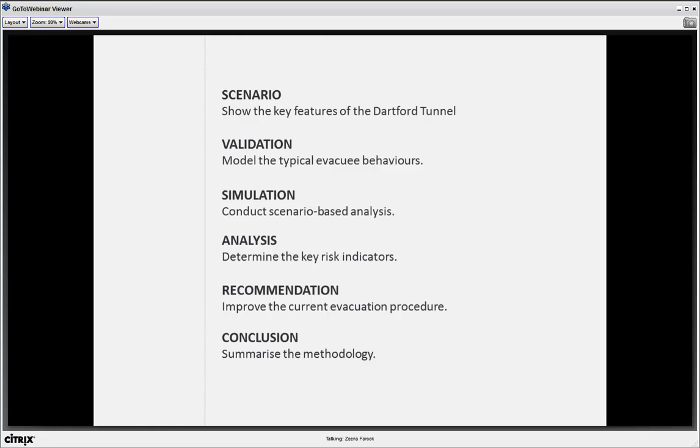So, why Dartford Tunnel? It is the busiest London road tunnel. It carries over 75,000 northbound vehicles a day, more than any other London road tunnel. Clearly, a fire at this key corridor is likely to bring loss of life and great economic damage. Therefore, a risk investigation on its current evacuation procedure is important to provide maximum protection.

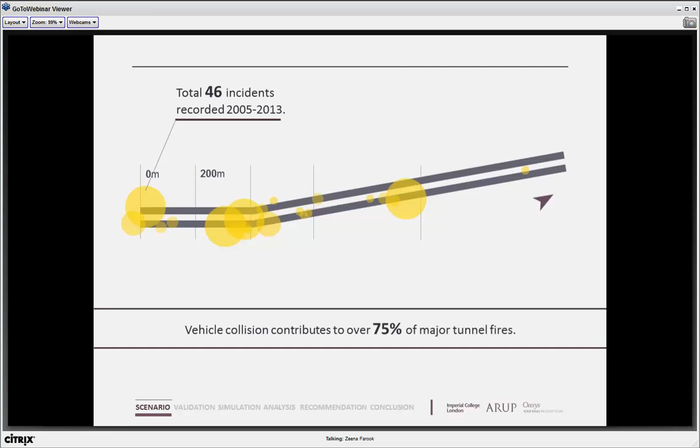To select the critical safety scenarios, we need information about past fire events. However, given the sensitivity of the information available, data on vehicle collisions is instead referred to in order to identify the likely incident locations. It is an appropriate assumption, as vehicle collisions contribute to over 75% of major tunnel fires globally. Most of the incidents occur at locations 400 and 715 meters inside the tunnel.

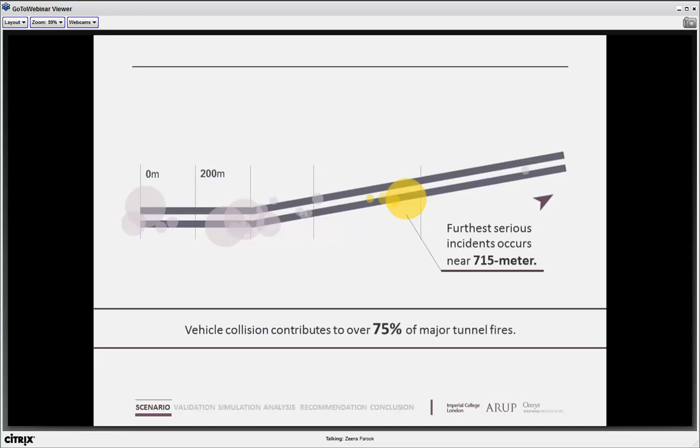For this demonstration, I will use the possible worst-case scenario at the 715-meter location, where we expect the longest evacuation distance, but also the longest evacuation time that may be required. When fire occurs, the tunnel entrance is expected to be closed within the first 3 minutes, depending on the time of day and how much traffic we get at that time.

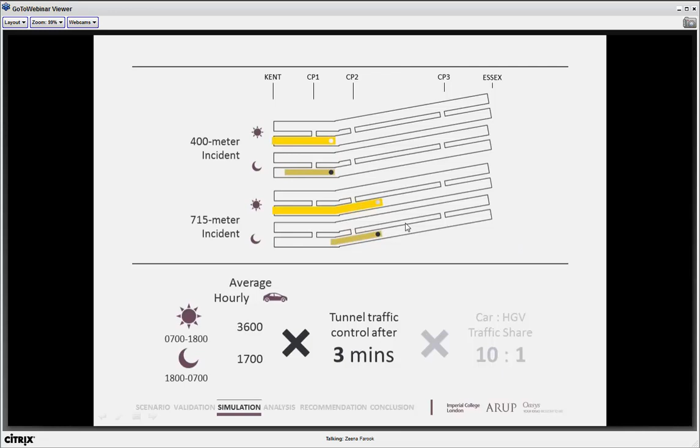We consider 4 different scenarios, and they all have different lengths of vehicle queuing inside the tunnel behind the fire spot, as you see here. On the other hand, the traffic share between cars and heavy goods vehicles is about 10 to 1. Considering the Dartford Tunnel is a very important truck corridor, it is important to model the presence of HGVs here.

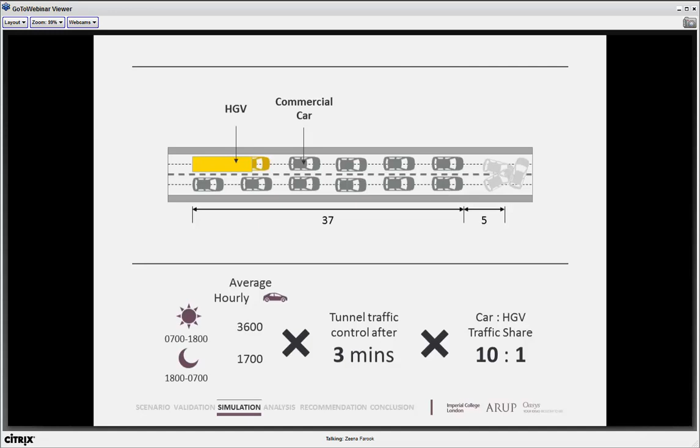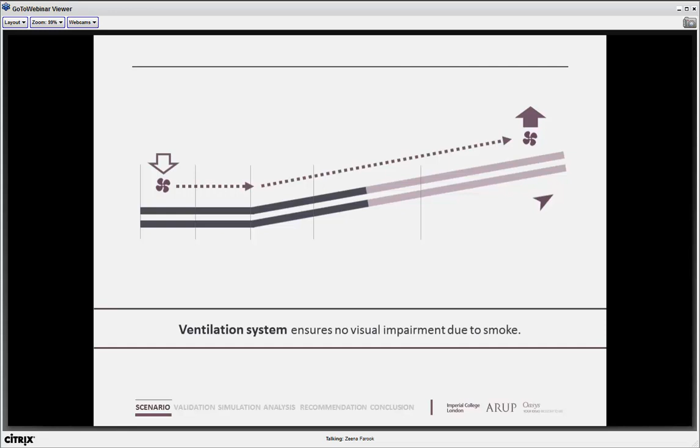Now, we assume all vehicles are accumulated in a regular compact format as so. They all remain stationary throughout our simulation. Furthermore, ventilation systems operate northbound to create a smoke-free evacuation area, so it ensures no visual impairment among the evacuees.

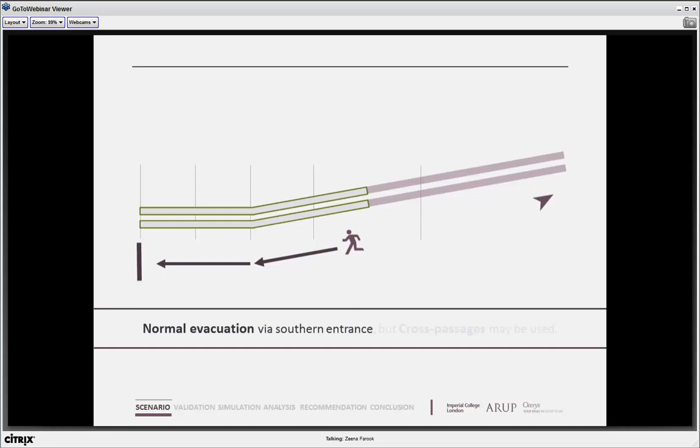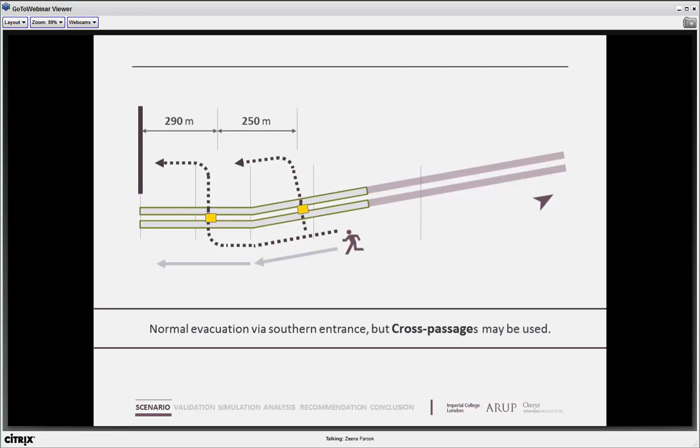Normal procedures require evacuation via the south entrance. Under special circumstances, the cross-passage facility may be used to reach the adjacent tunnel, and evacuees may leave from there. With the tunnel features and traffic data available, the 3D model is then constructed in Google SketchUp before being imported into MassMotion.

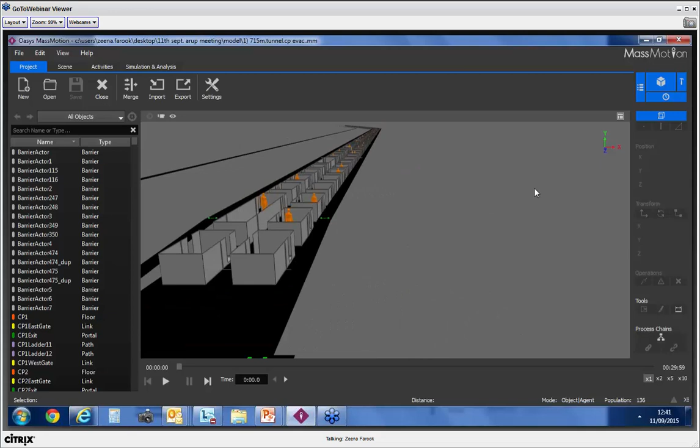The ladder accesses to the raised sidewalks, as you see here, are about 50 meters apart from each other and available inside the tunnels. Under the current traffic conditions, we expect many vehicles and occupants may be affected by the evacuation. So the sidewalks may be used as an alternative route to avoid congestion on the road surface.

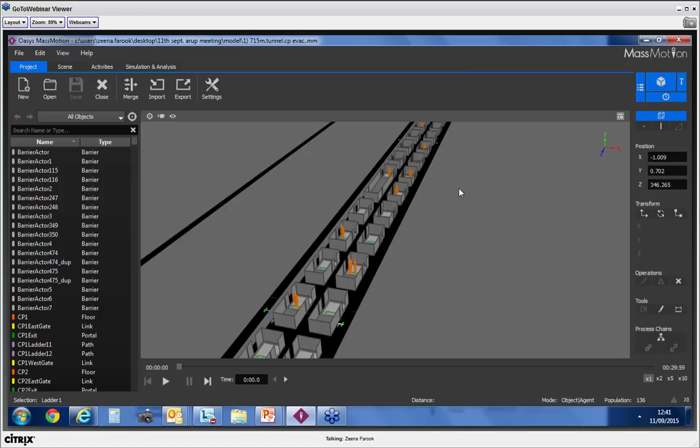Our model considers the evacuation in one of the twin bores. The cross passage, highlighted in orange, connects the sidewalks of the two adjacent tunnels. Furthermore, vehicles in our simulation are modeled as 4.5 meter by 2 meter hollow barrier sections.

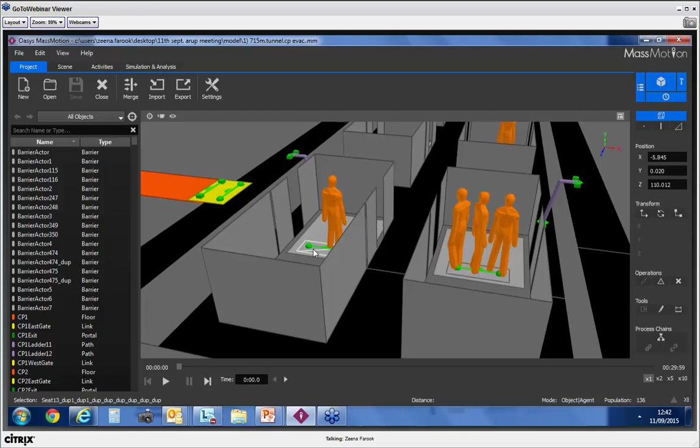The origins of agent movements here, called seats, are inside the individual vehicles. It's meant to mimic the realistic movements of people: to start the movement from inside the cars, open the door, and evacuate towards the safety exit, which is here, the tunnel exit.

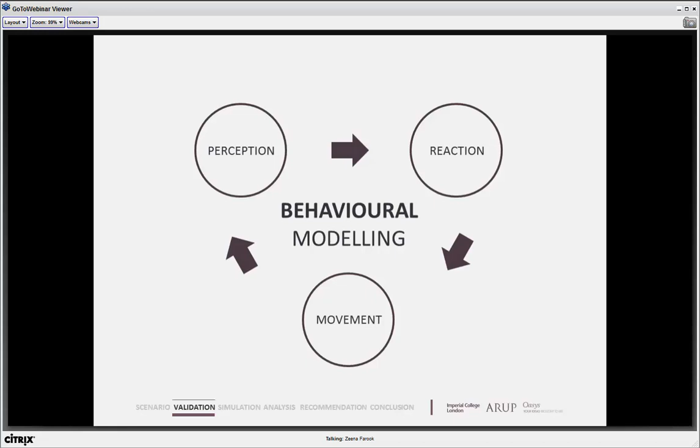Again, the evacuation area, as you see, we expect to be very confined and highly occupied. So the corresponding evacuees' behavior needs to be understood and carefully modeled. Traditional behavior modeling considers humans to perceive and react to the environment before they actually commit to the evacuation. This decision-making process is a continuous phenomenon during the entire evacuation procedure, but highly associated with individual characteristics. Hence, we want to use different modeling techniques to capture these differences and so model realistic crowd dynamics.

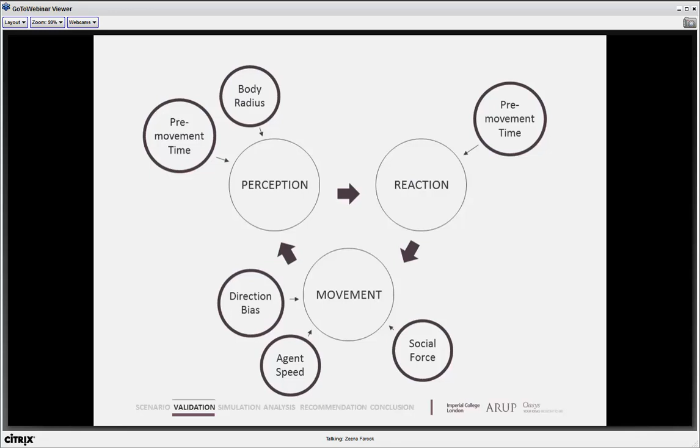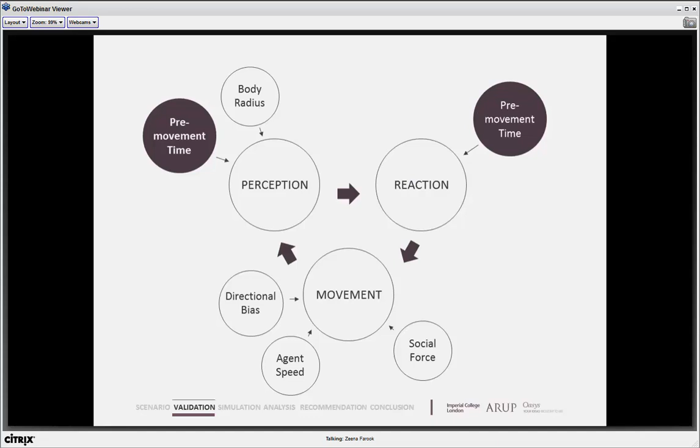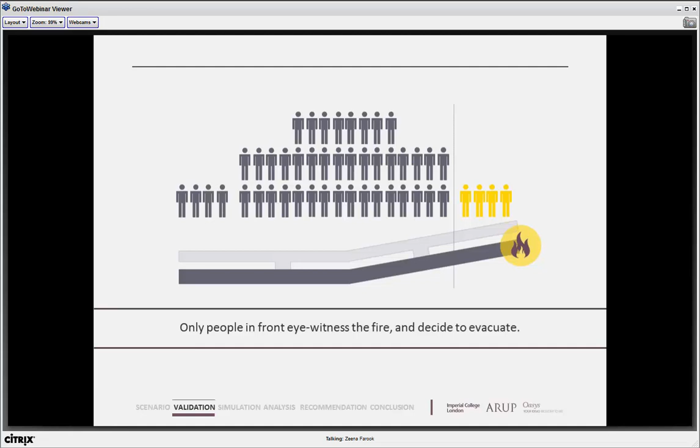The most interesting parameter to look at is the pre-movement times. It is indeed an influential factor in the overall evacuation time required. Initially, only the drivers in front of a queue encounter and observe the obvious danger of fire. That means flame, smoke, and heat. So they detect the danger and decide to retreat and leave the tunnel earlier. These actions then become a significant source of social influence, particularly in these commonly unfamiliar surroundings. And so it will initiate the group evacuation of most of the normal drivers left behind.

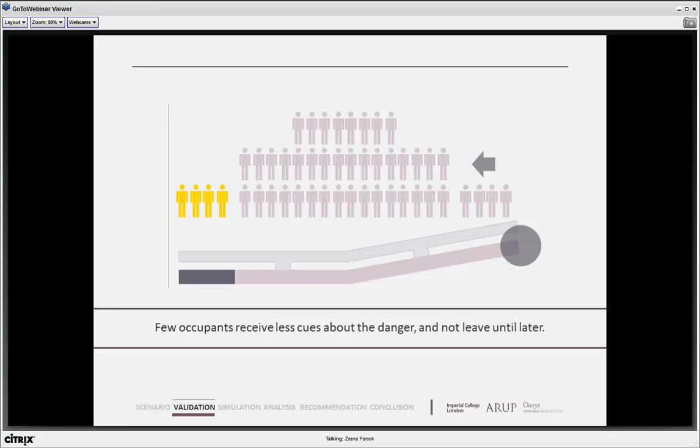Unfortunately, a small number of occupants situated far behind in the queue may receive fewer cues about the danger, because they won't see many things go wrong around them. So they would evacuate much later in the process. As you see, this wave pattern of extending evacuation time can be best generalized by a normal distribution, ranging from 30 seconds to 210.

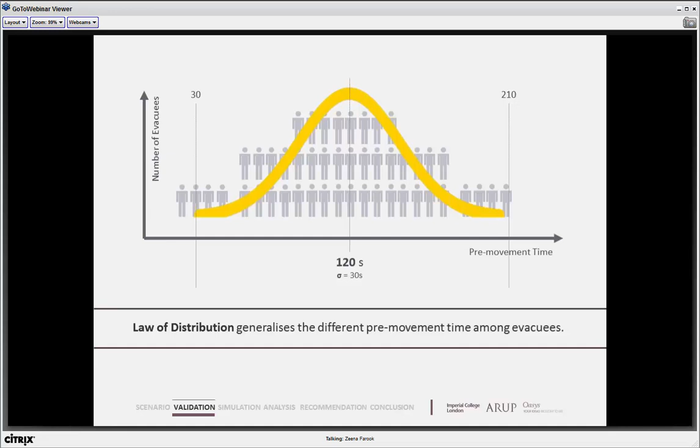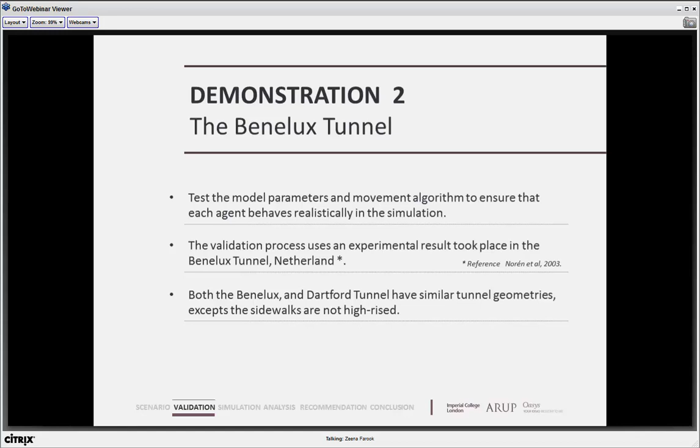The parameters were then tested to ensure each agent would behave realistically in the simulation. As no verified data on fire evacuation from the Dartford Tunnel is available, they were validated using results from a behavioral test of evacuation conducted in the Benelux Tunnel, Netherlands. Let's have a look at the validation model itself. A similar scenario, as you see here, compared to the one we had in the Dartford Tunnel is considered. This situation was injected at a mid-tunnel section with a similarly compact vehicle accumulation behind.

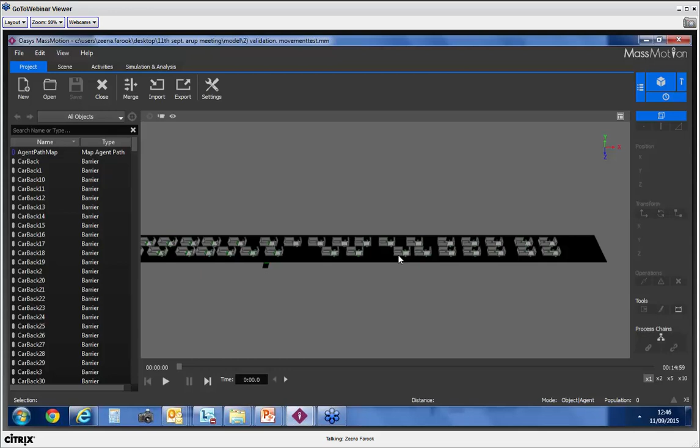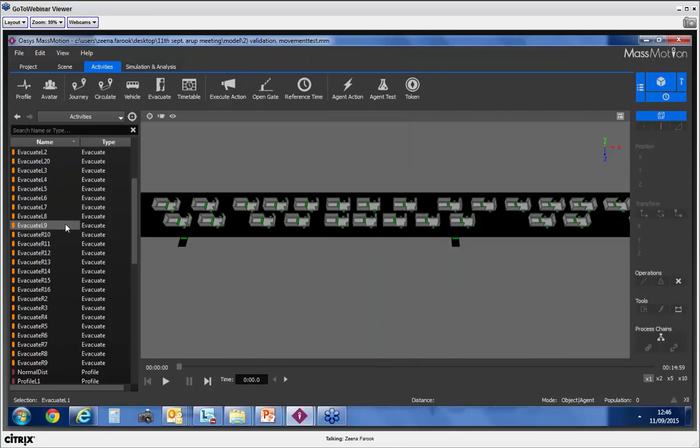All evacuees react to the situation within the expected range of pre-movement times. That means, as we mentioned, 30 seconds to 210. They all start their movement from inside the vehicles. See here. And all move towards the nearest safety exit available. This means, as you can see, this and here. The first experiment is to explicitly input the agent properties. Here we are talking about the origins, the pre-movement times they had, and of course the individual profile. That means the body radius and the speeds they had. And also we assume they remain constant throughout the evacuation process.

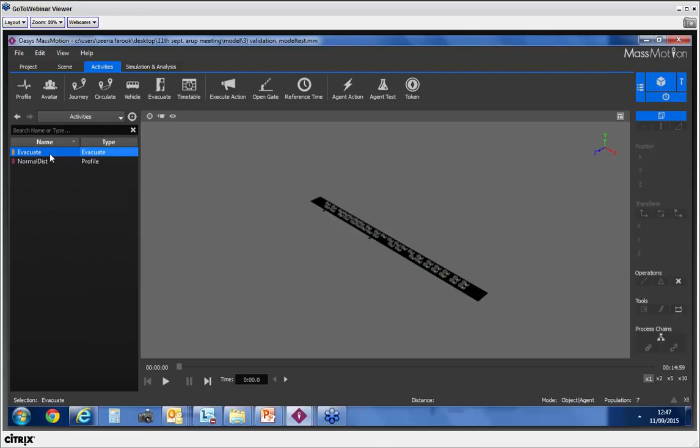The second model we use is probabilistic modeling on agent properties. Here we introduced a normal distribution on pre-movement times, minimum 30 seconds, maximum 3 minutes and 30 seconds. That means 210. Mean is 120, and standard deviation is 30 seconds. The exits are set to be these two that we mentioned, the safety gates. And of course, we also introduce a default normal distribution with a minimum 0.65, maximum 2.05, mean 1.35, and standard deviation 0.25.

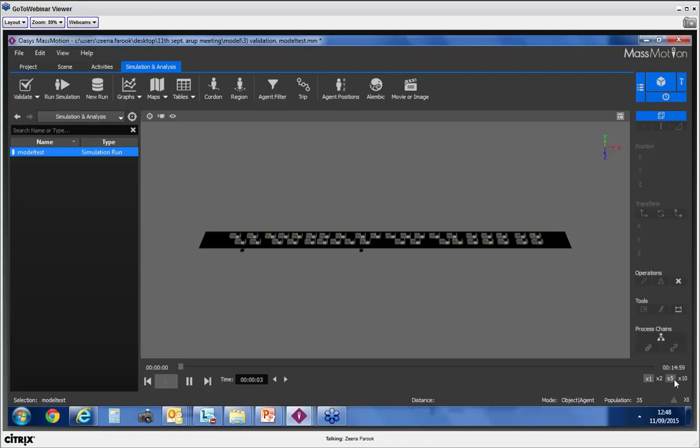So let's have a look how the evacuation will look. So make it a bit faster. They will start to move. They move out from the individual cars, and they will seek the least congested and nearest route to reach the exit. Individual evacuation time will be recorded once they reach the safety exit.

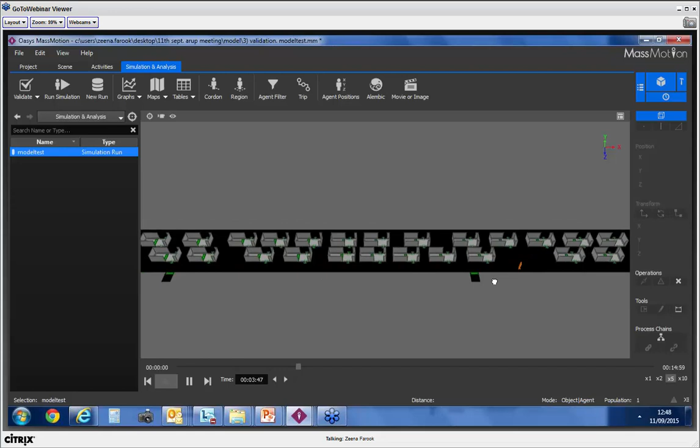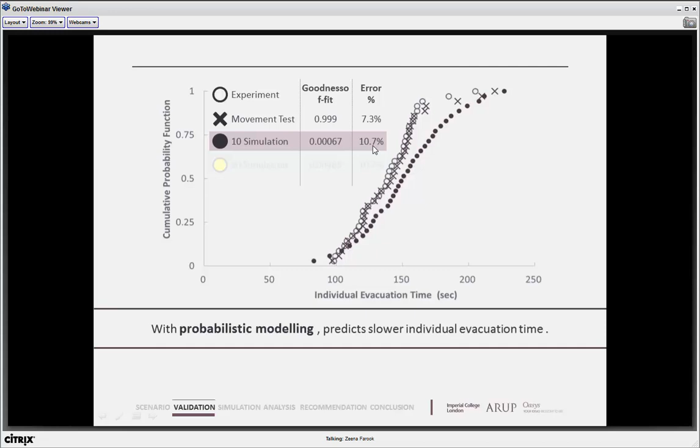So here we are. By explicitly inputting the individual characteristics, that means the pre-movement times, agent locations, but also velocity, the MassMotion model indeed reproduced the original individual evacuation time, within a satisfactory range of error of 7.3%. It certainly suggests that the movement algorithm is consistent in mimicking realistic crowd movement. On the other hand, the probabilistic modeling predicts a slower individual evacuation time, as you see here. The 10.7% modeling uncertainty is due to the nature of stochastic modeling. It is, however, affected by the number of simulations that we executed.

Here, by having an additional 20 simulations, the increment in goodness of fit suggests a clear improvement in prediction accuracy from 0.00067 to 0.00885. The generated 10.7% error on predicting the total evacuation time is acceptable in other validation projects of MassMotion. Here, without further simulations, the selected parameters are confirmed to be appropriate for our behavior modeling of tunnel evacuation later.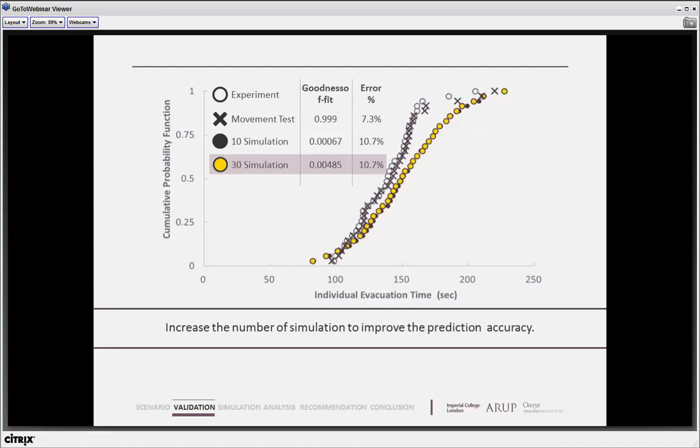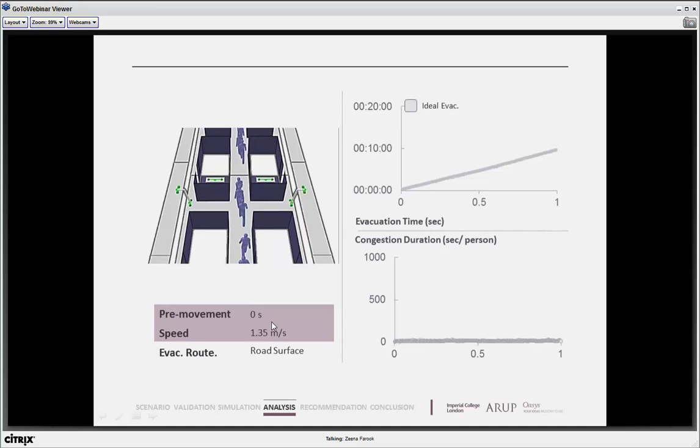Now, we have our parameters ready for the inputs. In this project, the following scenarios were evaluated, simulated, and the results collected. Firstly, a control experiment. It models the ideal evacuation, when all evacuees start to evacuate immediately without hesitation. In other words, pre-movement time equal to 0, and they move with a relatively similar, constant speed of 1.35 meters per second.

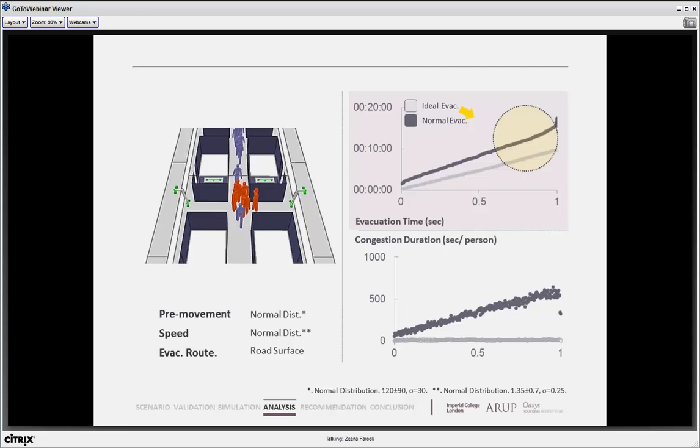A second experiment models a normal evacuation. Here we employ the distribution law of various pre-movement times and speeds, which vary from person to person. So the actual evacuation time is expected to be much longer. This increment is also believed to be due to the level of congestion evacuees experience, as the movements are interfered with and slowed down. So in the third experiment, as I mentioned before, all evacuees are modeled to use the sidewalks to avoid the congestion on the road surface. Interestingly, the simulation has indicated increasing congestion and resultant time delays.

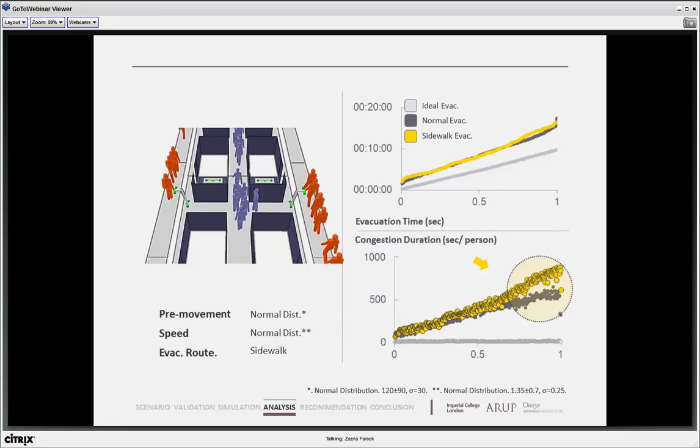In other words, the higher level of congestion they experience, the longer the evacuation time may become. To show where congestion may occur, let us have a look at the experienced density map distribution in MassMotion. Generally, people tend to choose the widest and least congested route to evacuate. This means here, which would be the mid-tunnel routes.

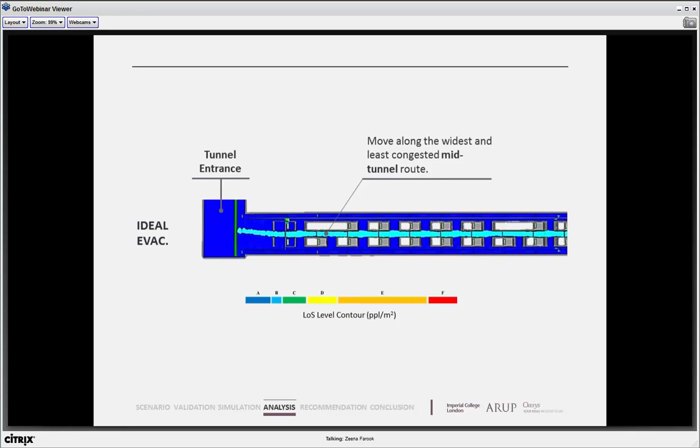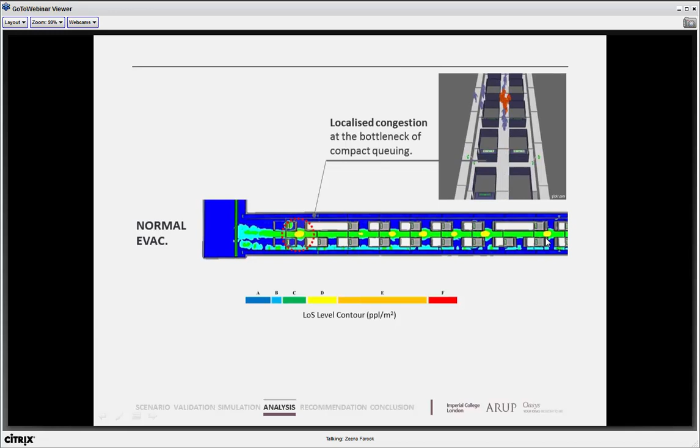In real evacuation, the resultant crowd dynamics would conflict with the stationary vehicles at the bottleneck, and therefore contribute to the localized congestion, as you see the reddish spot here, here, and here. When switched to the sidewalks, the approaching evacuees cannot overtake the slow marching company in front of them, particularly on the narrow 0.9 pathway. Therefore, additional congestion will be introduced.

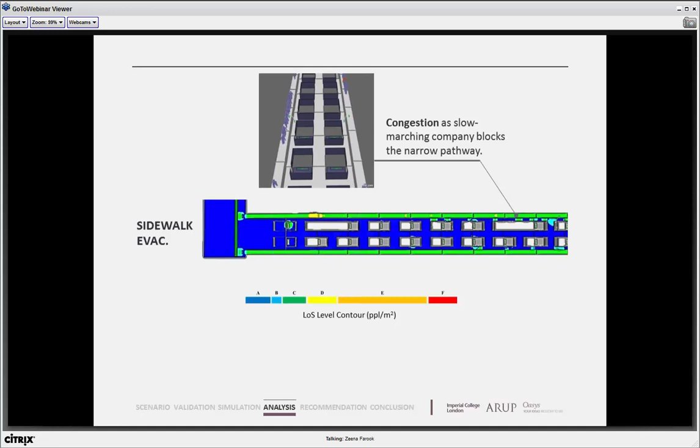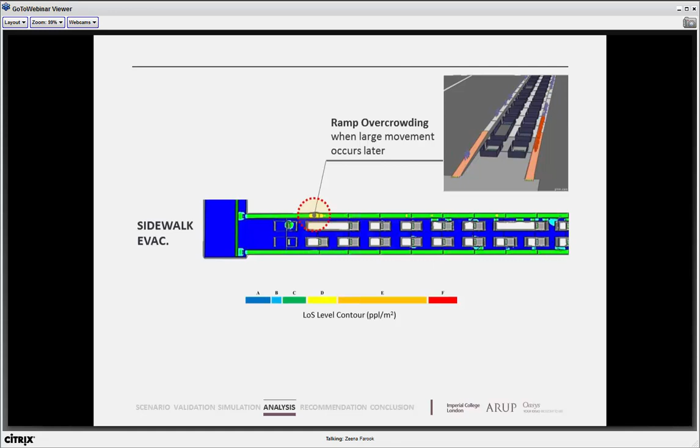Eventually, this unidirectional evacuation flow would overcrowd the ramps area near the entrance. It magnifies the congestion towards the end of the evacuation process. Furthermore, many real experiments report other sources of congestion. Evacuees may stop during their movement to seek extra safety information, such as readouts from the emergency signage. The stationary bodies can block others' movement, so congestion may occur.

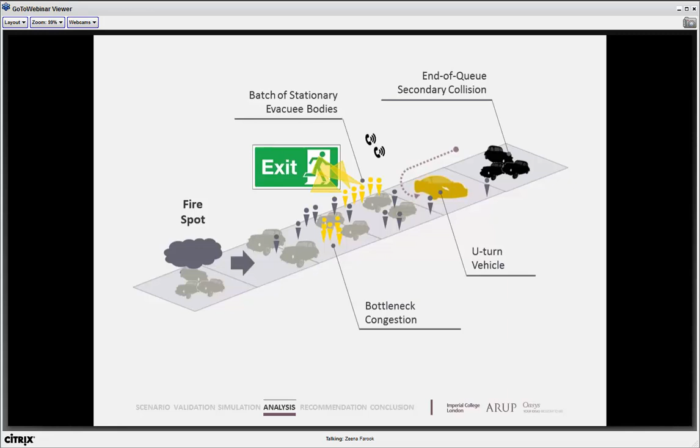From the driver's point of view, they sometimes execute the so-called U-turn driving to try to go around the queuing in front. Occasionally, it may cause additional secondary collision, which would block the entire road space completely. Congestion is often used to evaluate the user experience and system efficiency at a certain pedestrian density. The delay, as a result of it, increases the threat on evacuees of being caught by the quickly spreading smoke, particularly in tunnel evacuation scenarios.

Because the time and safety resources are very limited, it may also bring unnecessary stress among the evacuees. The potential resultant excessive behavior, such as stampede or overreactions, would cause further casualties or injuries. Here is some real observation during a real evacuation in the Blackwall Tunnel 5 years ago.

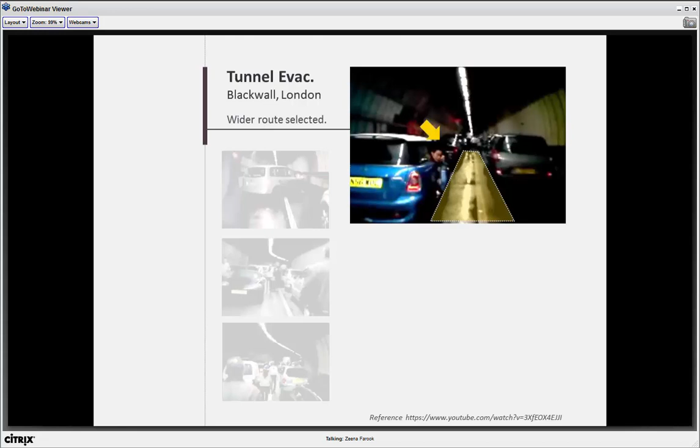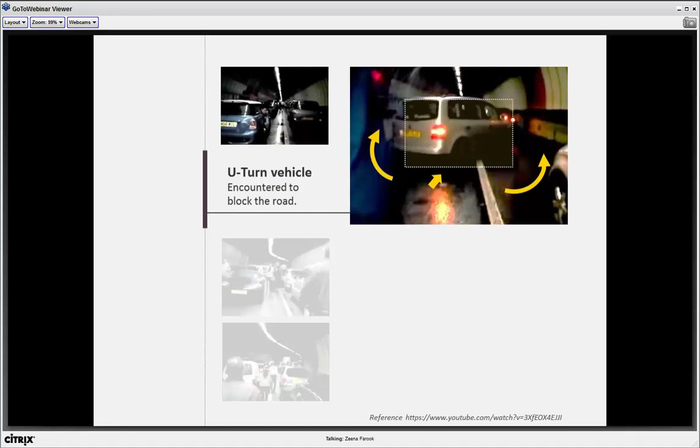Initially, people chose the mid-road and the least congested road to walk before they encountered the reckless U-turn driving and were forced to go around. Later on, the evacuating cameramen were seen by other occupants. They start to realize the problem, they start to evacuate, and it leads to congestion on the road surface. We have seen these safety issues earlier in the MassMotion simulation. That means how people choose the route, how social influence may affect individual decisions, and how congestion can affect the evacuation dynamics.

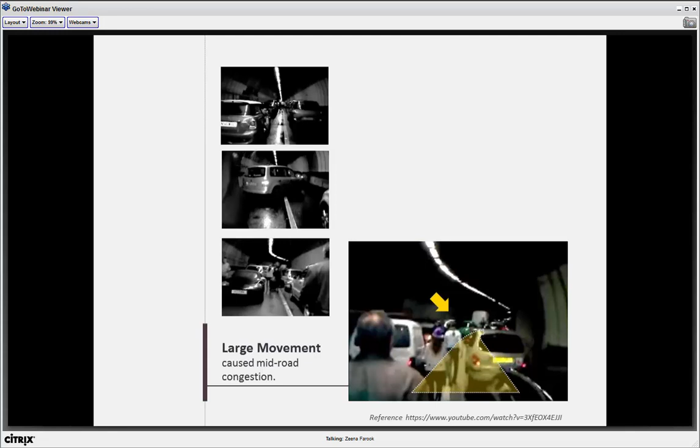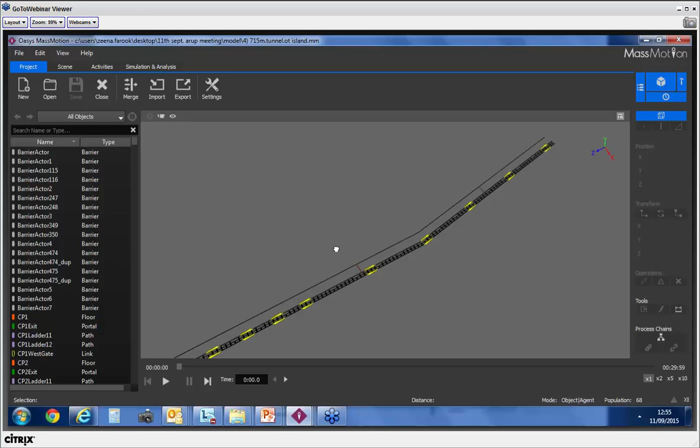In other words, our recommendation should aim to reduce the individual evacuation time, and that can be done by reducing the level of congestion. So let's have a look at how we can do the mitigations. Here is the evacuation scenario for the sidewalks evacuation. We put two barriers acting as secondary collisions at the end of the queue to block the entire road surface. So we use this to force the agents to use the sidewalks via the nearest ladder access.

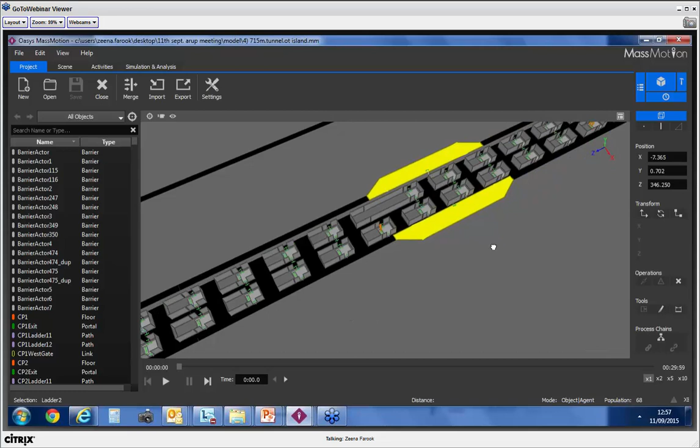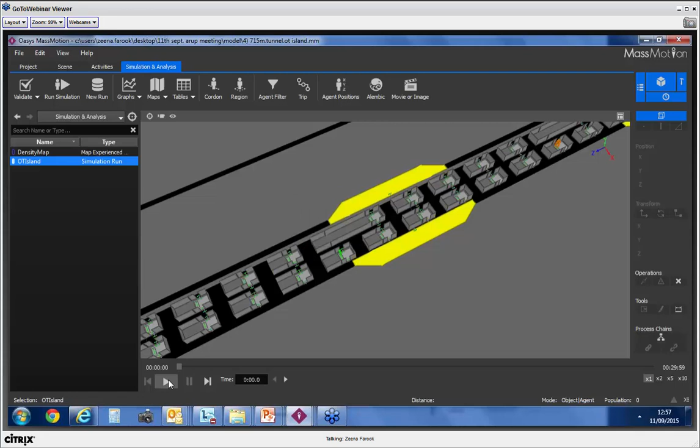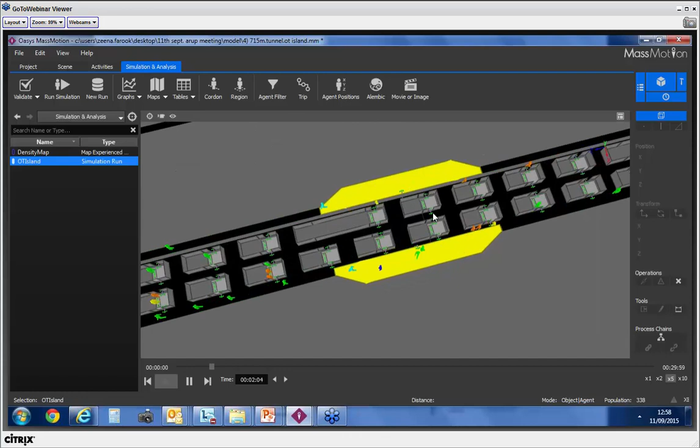And right now, there's still all the evacuees. They start to realize danger. They start to evacuate because they can't leave via the road surface, so they have to use the ladder to get onto the sidewalks. See here, and they all move towards the assigned exit, which is the tunnel portals. Soon you will see they start queuing. They start to see the queues. Let's just slow down a little bit. For example, here,

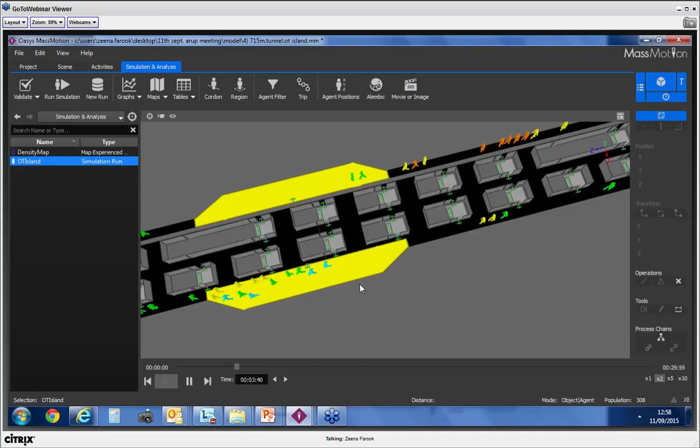see these queues. And when they get onto the overtaking island, the extra walking width allows the evacuees behind to overtake the slow marching company in front and carry on with a relatively higher speed of evacuation. Also, you can see here, they start to move around, find the free space, and carry on with the movement. Let's see the density map of this analysis. You can clearly see a dissipation of the evacuation flow once they get onto the overtaking island. So it certainly suggests that congestion is indeed reduced.

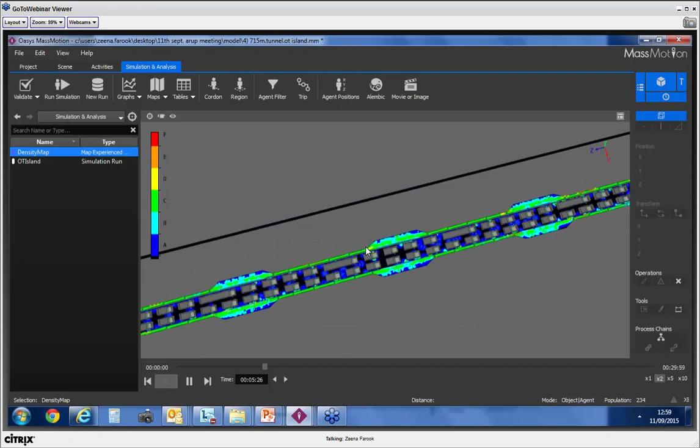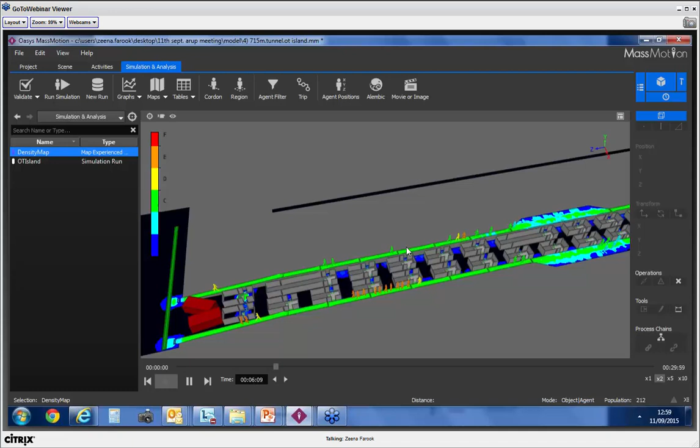Of course, considering the width expansion for the entire tunnel is going to be highly expensive, I proposed several OT island installations to ensure the slow marching company, the queue, can be completely dissolved and disintegrated. That means if you see the crowd here, it will be less overcrowded. The queuing actually is still there, but obviously going to be much shorter. And also there will be sufficient headway between them. So this is the first strategy we proposed, to use the overtaking island, and this is a passive control strategy.

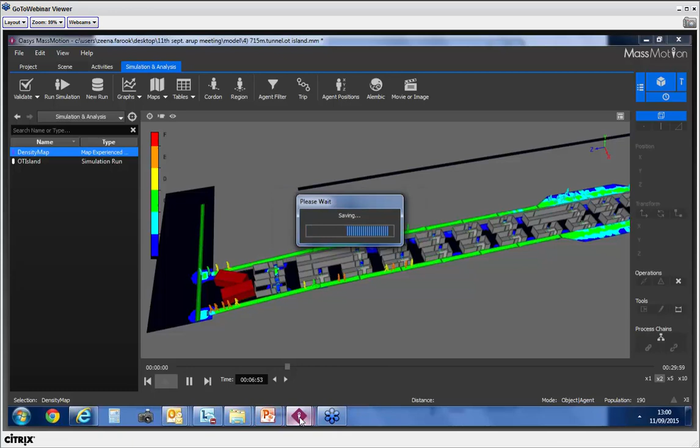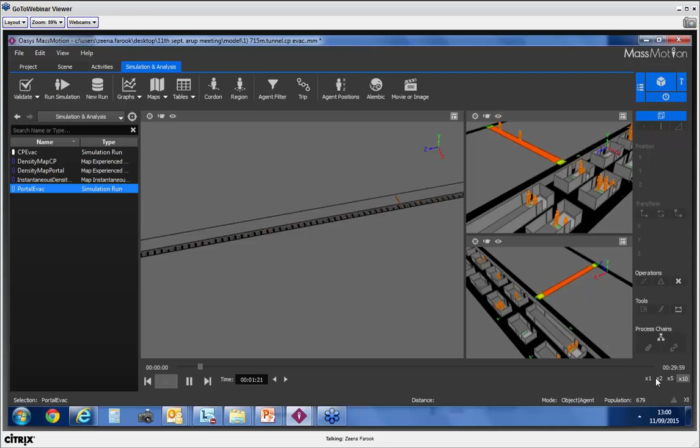The second plan we use is to run a cross-passage evacuation. Again, let's speed up a little bit. So this window here is for cross-passage 1, and this is for cross-passage 2. You see here. The alternative exit allows a two-way evacuation. That means to divert the flow from the portal directions. Let us see the density maps again.

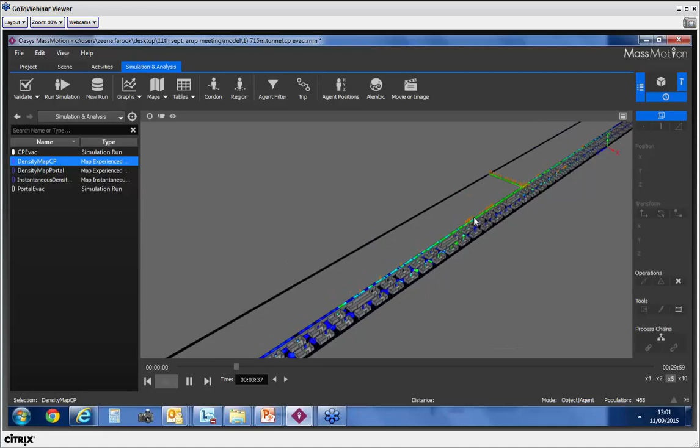Cross-passage operation, as you see here, makes the evacuee situated further behind the tunnel. For example, this part doesn't need to travel all the way up to the tunnel entrance. So they can just choose the nearest exit where possible to leave the incident-impacted tunnel.

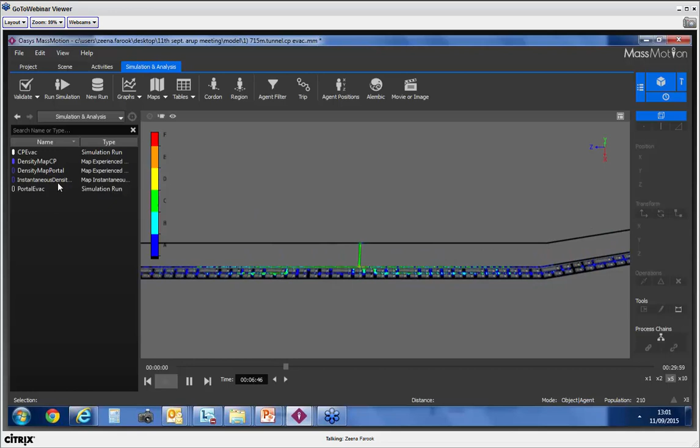Lots of reddish color disappears if we compare this to the density map of a normal evacuation. You clearly see a change that most of the reddish part actually disappears, which shows a magnificent reduction in congestion duration.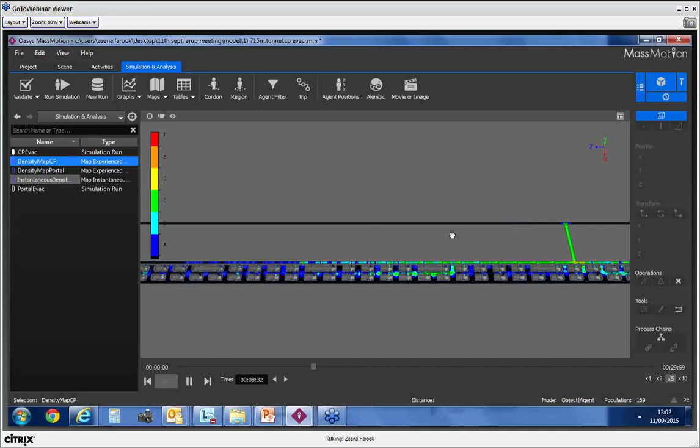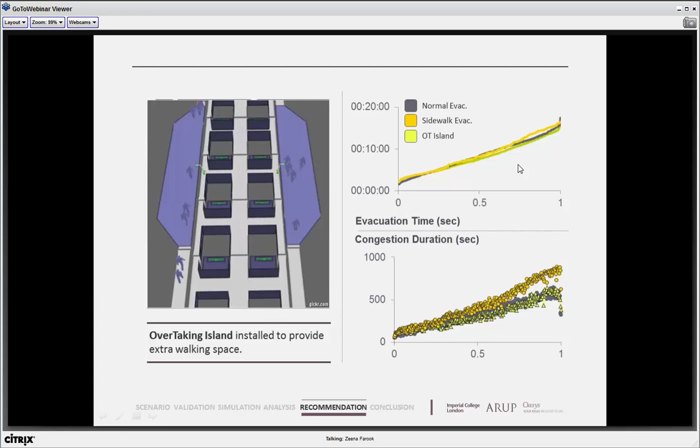Are they actually working to reduce the total evacuation time? The answer is definitely yes. Here, by alleviating the congestion using the overtaking island, we reduce the evacuation time for over 75% of the evacuees. This is because with less congestion, they can walk at a much higher speed, so they can reach the safety exit much earlier.

On the other hand, the active controls using the cross passage further reduce the evacuation distance for evacuees to reach the nearest exit. So here, the decrease in evacuation time is considered to be a coupling effect of congestion reduction and distance reduction together.

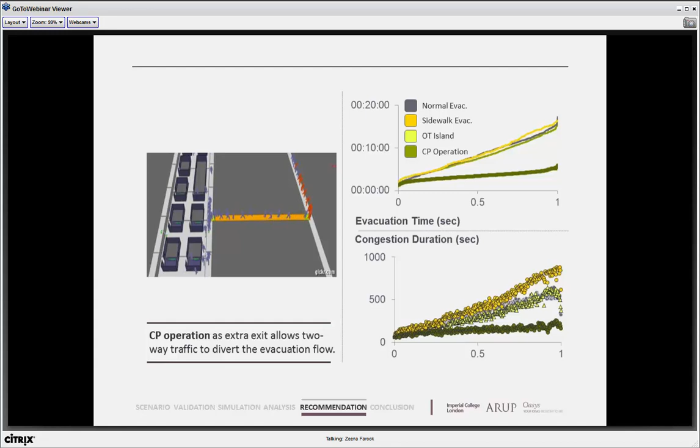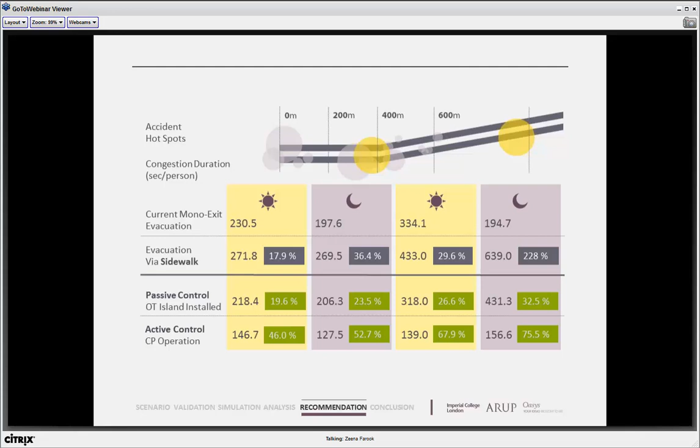Both the passive and active crowd control strategies are highly effective. Application of cross passage would deliver a remarkable reduction on average congestion by up to 75.5%. In many cases, it will certainly optimize the current evacuation plan in terms of alleviating the congestion. So we believe it's going to reduce the evacuation time required. It is important to have this additional safety time, resources, and exit available. It would help us to create a calm and safe evacuation order.

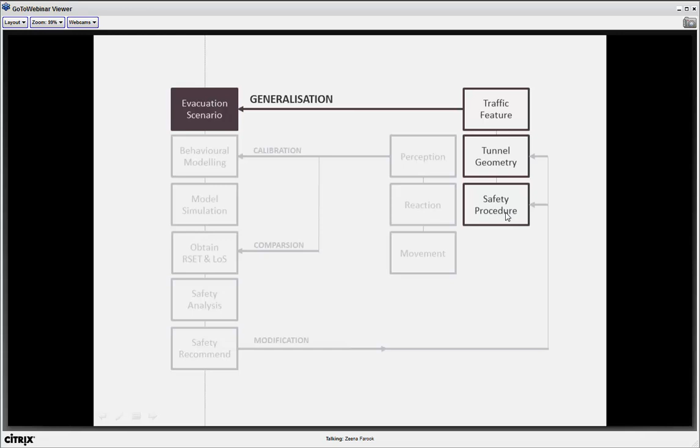So far, this project has shown you how a designed fire safety strategy can be evaluated and designed in a systematic manner. We first realised that the analysis requires considering a range of safety scenarios. It should generalize the key safety features, the traffic features of the tunnel, its geometries, as well as its current safety procedures. It then gives us the confidence to select and model the appropriate behavior factors, which must cover the following three stages of human decision-making process: perception, reaction, and movement.

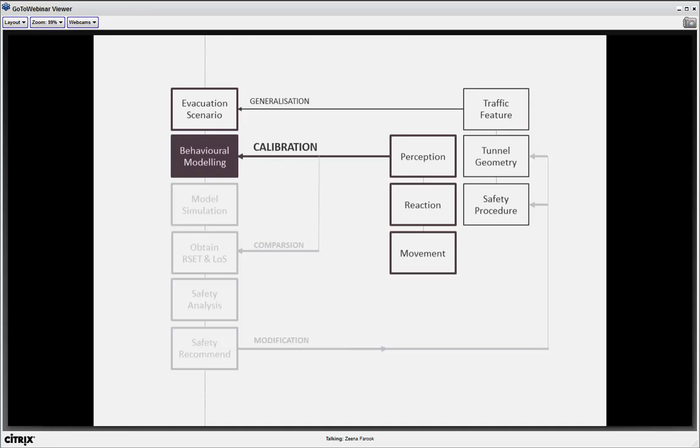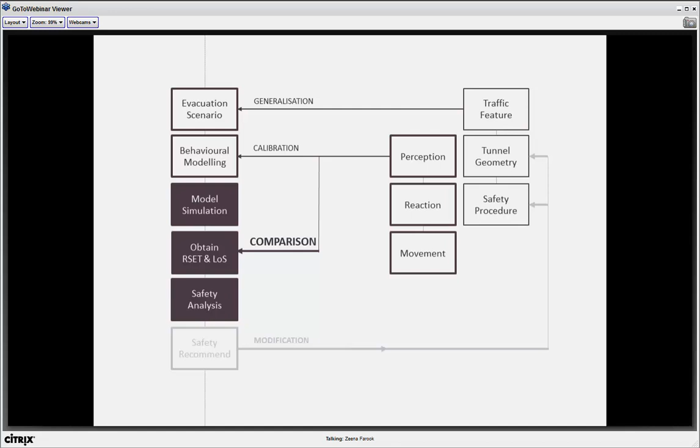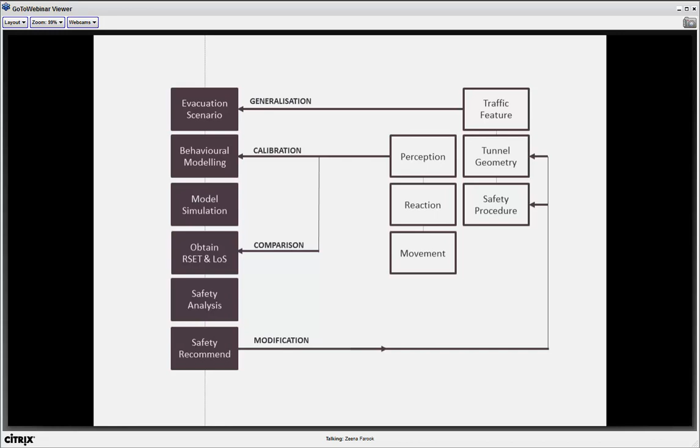Of course, a major uncertainty introduced to simplify a real fire evacuation situation is that we omit the influence of fire dynamics. This is mainly due to the current missing input available in the MassMotion version. As we previously addressed, the coupled effects of rapid heat and smoke propagation in a confined tunnel space can physically disrupt the perception of the occupants, and so distort their decision-making process.

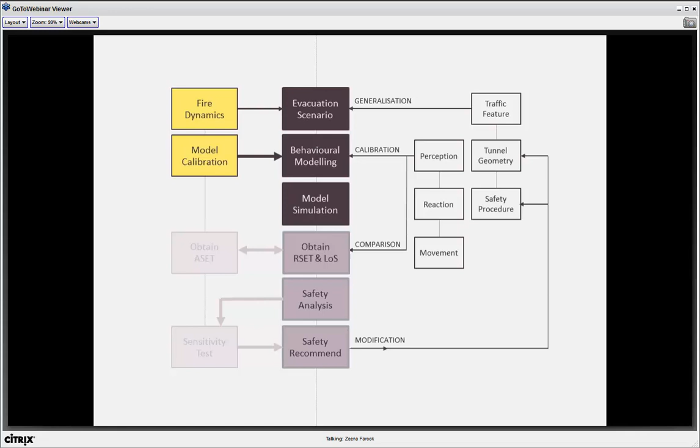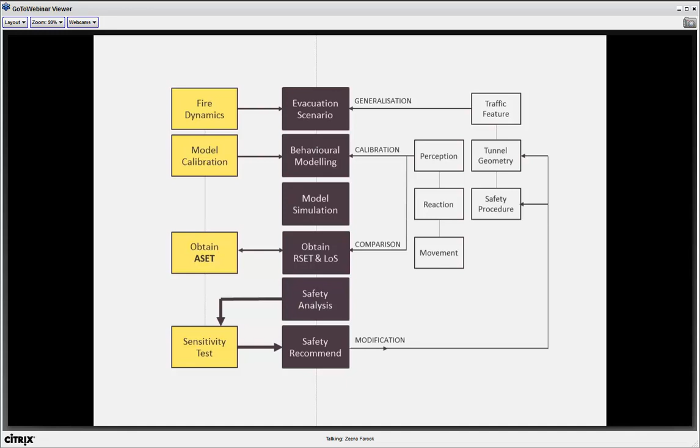Hence, further sensitivity tests will be able to obtain more results and help us refine the previously proposed modifications. Overall, this continuous effort at improving the model reliability is critical to understanding the resulting human behaviors. Most importantly, it formulates a long-lasting and robust safety strategy.

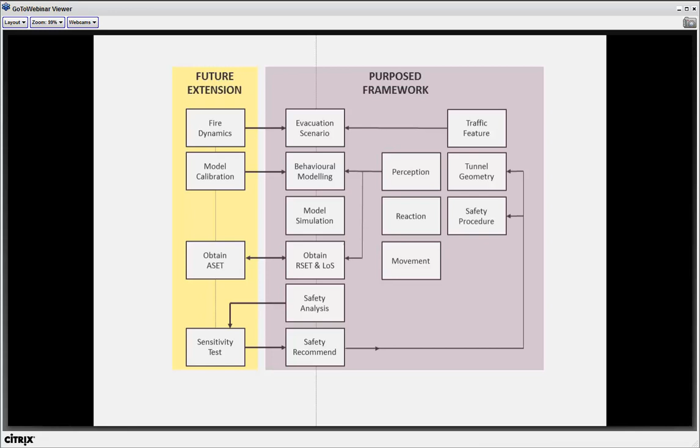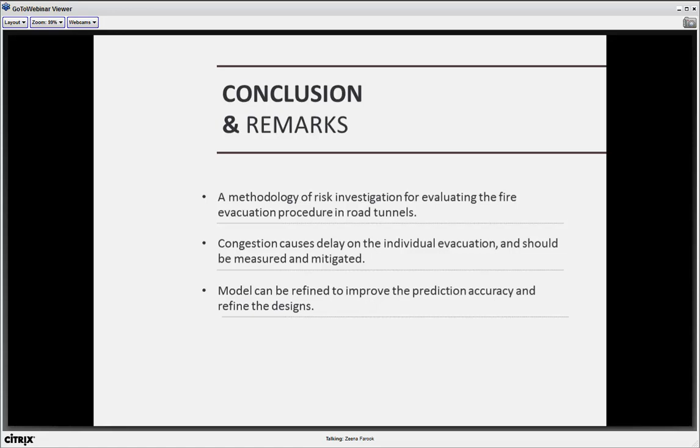To conclude, the project demonstrates a practical methodology of risk investigation for the tunnel evacuation procedure. By using the agent-based MassMotion, I have shown you how congestion causes delays on individual evacuation, particularly during a large-scale event, and I also showed you how we can use modifications to alleviate them. Thirdly, we further agreed that the model can be refined in order to improve its prediction accuracy. In summary, we recommend this methodology proposed in this project be used in future risk investigation.